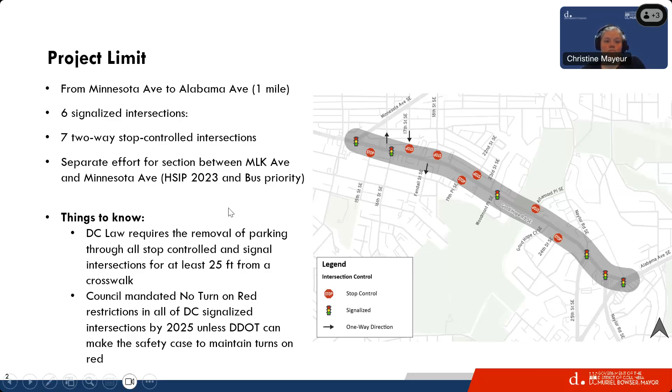We do see a lot of pedestrian crashes as well. That's why you'll see a focus on pedestrian safety and access to different landmarks, libraries, schools, and bus stops as well.

So we've heard from you previously. I went to the February ANC meetings and kicked off this project with everyone, as well as the Fairlawn Civic Association. We had community walks in February: a virtual walk, an in-person walk on a Saturday, an in-person walk Monday morning, and then a virtual walk in the evening.

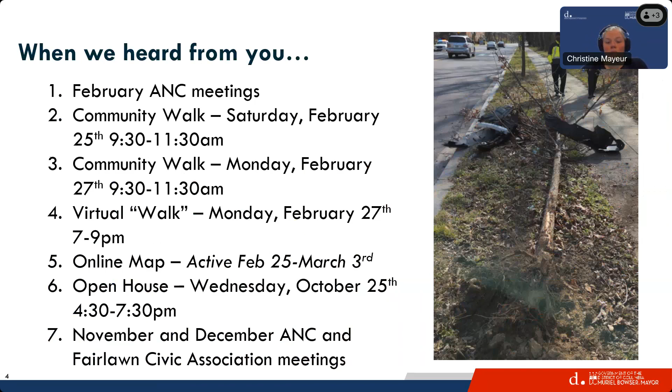We're coming to the November, December ANC meetings, Fairlawn Civic Association, to let you all know about this, and hoping to hear more from you tonight about what you think. Then on Saturday, we'll have an in-person meeting. You can just drop in whenever. We'll be at the Anacostia Library from 11 a.m. to 12:30 in the large meeting room. So if you want to talk more, please do come by.

What we heard from you in all of these meetings - I won't read all of these - but kids don't feel safe crossing the street to get to Ketchum. We have siblings dropping their younger siblings off at Ketchum, going to school at Kramer and Anacostia. It doesn't feel safe to cross the street.

Drivers go too fast on Marion Barry, especially on the hill near Marbury Plaza. The area near Skyland gets really congested. People are blocking lanes trying to get in and out of the CVS. And the sidewalks can often be uneven and may have some tripping hazards as well.

We heard some from the bike community, the folks at Bike in Ward 8 as well, that it doesn't feel safe to bike on Marion Barry Avenue, and the routing into the neighborhood would feel less safe as well.

So the goals of this project and all corridor safety projects are, number one, to reduce speeding. We want to also improve safety for people walking, taking the bus, driving down the street. We want to address safety and crash patterns at any complicated intersections that exist, any of those skews where you can't quite see.

We want to remove or enhance safety and visibility at uncontrolled turns from side streets. We have a lot of sightline issues, especially in the older, more historic Anacostia area of Marion Barry. So it's really important so that people can see when they're making their turns, so they don't get in crashes. Enhancing crosswalk safety so drivers and pedestrians can see one another much better, and improving bus service and access to the bus stops along the corridor.

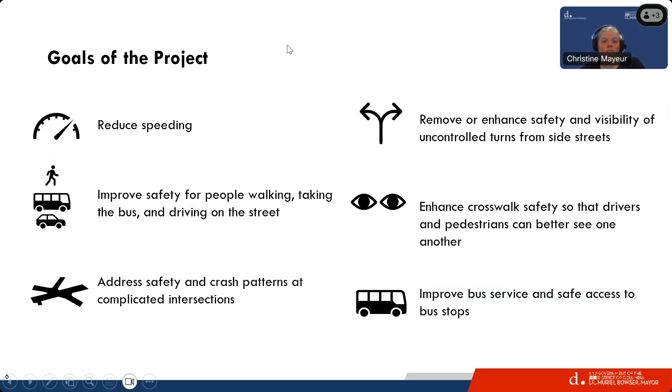So we are hoping that this can be a quicker process, so that you don't have to wait years and years to see safety improvements to the street. We're aimed at finishing up this concept this fall and winter, presenting a revised concept early in the new year. And then from there, starting the construction design plans and getting that built on the street.

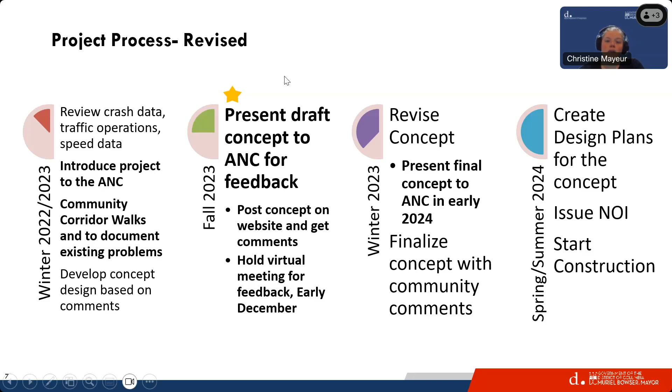We are going to be doing this in a temporary treatment format, so that if there are changes or adjustments we need to make after it's all implemented, we can evaluate that and come back and make those changes. That way we're not having to completely redo a new curb and tear up the street again and again for construction. So these temporary treatments and quick build treatments allow us to test things out before we go into a major capital project, moving curbs and doing concrete and all of that.

So we'll get into the draft concepts. I'll walk through these - please put your questions in the chat as you go, or you can hold them till the end. I want to get through all the slides, and then we can talk about a couple comments and questions as we're able.

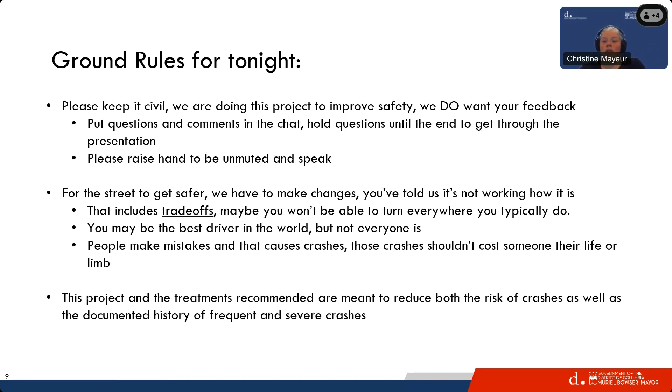Okay, so we'll go ahead and start at Minnesota. This is the beginning of the project area. We'll establish a left turn lane here at Minnesota as you're heading away from MLK.

After you get through the intersection, we know a lot of people park along this, and it can tend to block up the intersection. So we're trying to keep people from parking through there and help traffic move through a little bit safer.

There's an option for turns coming off of Minnesota. This is a right turn only lane as you're coming off of Minnesota Avenue, and you're not allowed to make left turns. So there's an option to either do a curb extension, which is a little bump out you see there in blue, or, as you'll see on the online map, we can do a median island that would really prevent people from holding up traffic making a left turn when they're not supposed to. We ask about that in our feedback form, and I'd love to hear feedback on it. Please let us know what you think.

Most of the corridor you'll see is still a single lane in each direction, just as it functions today. But marking out the parking really helps to visually narrow the street, so people travel slower in general.

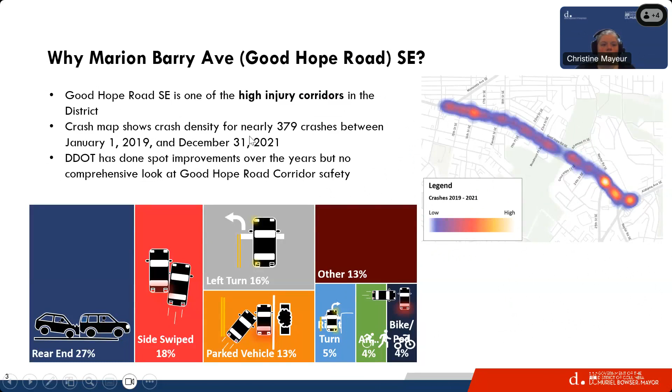Starting at Minnesota, we've got two options for safer operations here. For the right turn coming off of Minnesota, we can either do a curb extension, a little bump out, to shorten the crossing distance, or we can put in a median island to make sure people aren't making left turns illegally from this right-turn-only lane.

For eastbound Marion Barry, establishing a left turn lane so people can wait out of through-moving traffic and have a safer way onto Minnesota. Coming through the intersection, we're blocking off so it's not as easy to park through the intersection and block traffic, instead marking where people can park just past the intersection and prior to it on the other side.

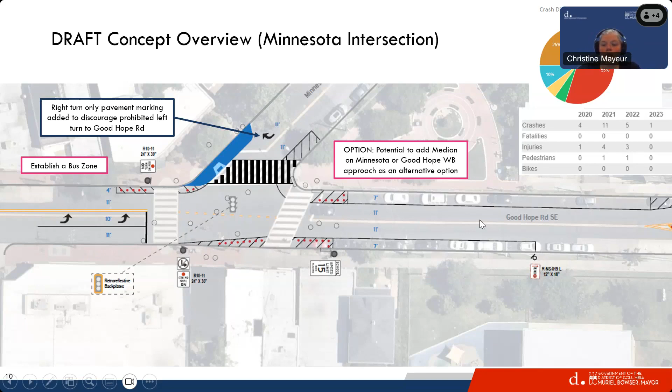At 15th Street, we're looking at a signal and a way to make the crosswalk safer for Ketchum. If the signal study finds the intersection isn't appropriate for a signal, then we look at treatments like a marked curb extension, a little concrete median island, and some enhanced signage for visibility.

For 16th Street, adding a crosswalk just before you get to where the current signal is by the bus stop. That way, for the bus stop on the westbound side of the street, kids getting off the bus who need to get back on to get home have a safer place to cross that's not within the existing bus stop area.

And in the laundromat area that we've heard a lot of concerns about, adding curb extensions or little bump outs. And we can add another signal, a little light, so people know where to cross, and we can stop traffic for people trying to cross in an easier way that simplifies everything.

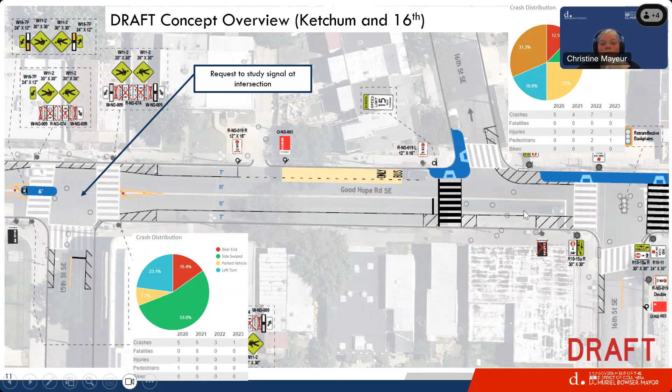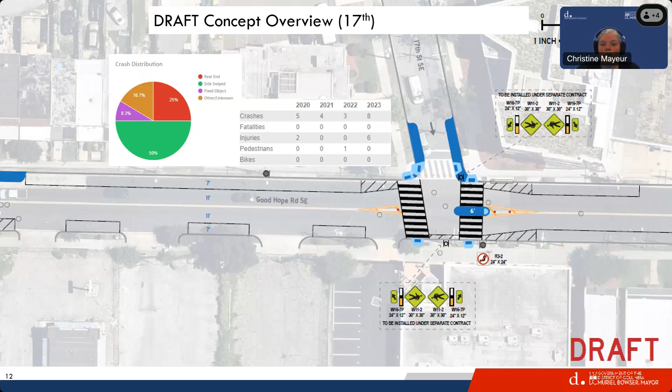Up at 17th Street near Bread for the City, we're looking at adding crosswalks, a median island, and some bump outs. We need to make sure this works with the bus movements coming to 17th Street, but enhancing that crosswalk, especially the one connecting the Bread for the City side with the community center, with a little flashing beacon where you press the button and cross when it's clear, with traffic stopping for you.

Between Fendall and 18th, as you're heading towards the library, not much really changes. We're just marking out where it's legal to park, and where it's not legal, hashing that out and adding some kind of hardened barrier so people aren't illegally parking.

We are looking at a signal for 18th Street to see if we can enhance safety that way. And then at the crosswalk that's existing, adding a median island, a little concrete island, so that people have a safe place to wait in the middle as they're waiting to cross both lanes of traffic.

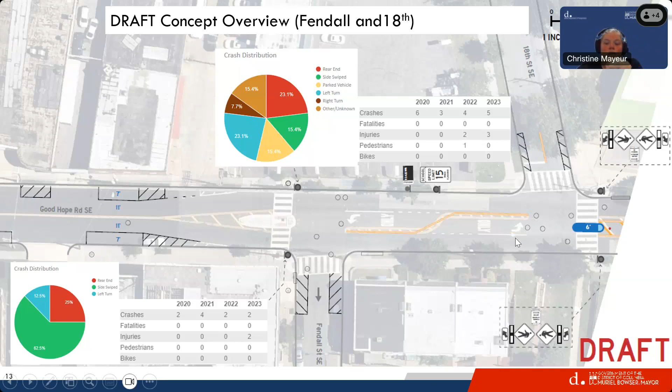Heading up towards Thelma Jones, we're looking at adding a crosswalk here right at the intersection and potentially blocking off the alleyway so that you can only make a right in and a right out. We see a lot of crashes here for the amount of people using it. So one way to reduce crashes is to sort of make that so you can't make the left turns in and out; we tend to see the crashes happen because of those. So with this, adding the crosswalk, adding a median island, and then adding a flashing beacon as well. That'll help people cross.

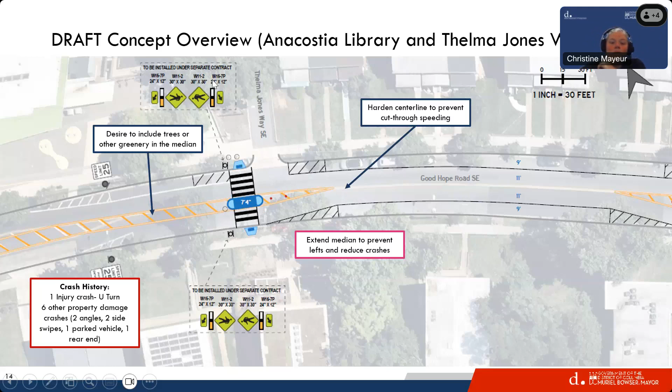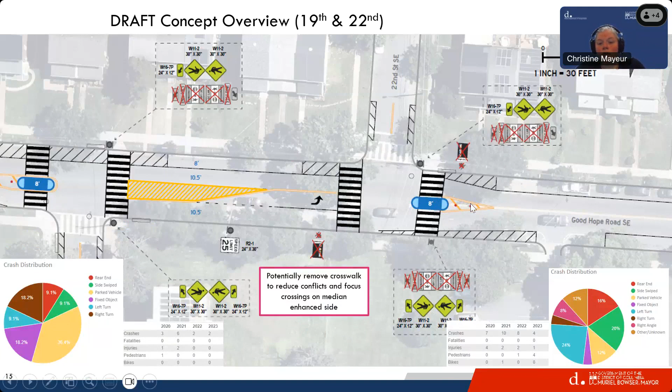Up here between 19th and 22nd, this is where it starts to get more residential as you're heading up towards Marbury Plaza. Adding crosswalks here, marking parking on the north side of the street. Adding a left turn lane for 22nd Street. So there's a little pocket there. You can wait out of the way of moving traffic. We can add concrete median islands to some of these crosswalks as well.

And as you're up here near Marbury Plaza, we've got a marked curb extension here that we're looking at doing in concrete, and that'll shorten the crosswalk for the seniors that live up here. Adding some signage. Generally, what you'll see across the corridor is signage and retro reflective backplates that help people be more aware of the traffic signals that are there, so they're not running the red light just because maybe they can't see it.

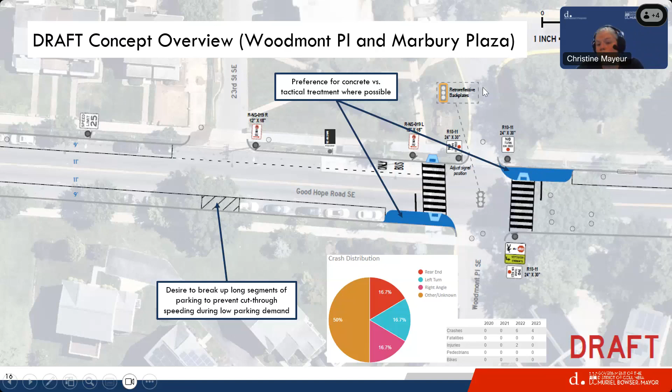As you come up the hill towards the hiker biker trail, this is the crosswalk that currently serves both sides. So adding a concrete island and then adding the beacon, the same kind of pedestrian beacon, making sure that it's clear that it is only one travel lane in each direction, and marking parking, and then a median for that section to hopefully reduce some of the speeding that we see through the area.

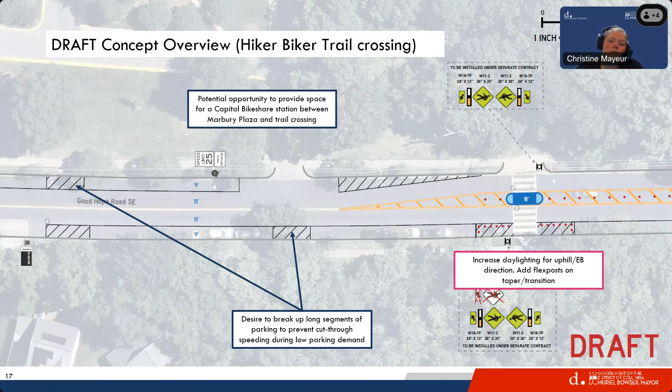In the parking, we're going to break these up. Of course, there's a couple hydrants along the way, but we don't want the parking, if it's not used well, to be used as a passing lane. So we're looking at breaking that up. And there is absolutely the potential to add bike racks or micromobility corrals in these areas as well.

Altamont's another location. We're looking at a signal. We see high rates of crashes in this area because of speeding and some due to turns and hitting poles and things along the street. So looking at a signal, looking at ways to make it a little bit slower through this area, and then establishing a left turn lane for people to go up Altamont.

Altamont could be turned to one way. We have that option. We can do that through this project. But that would be one way heading towards Naylor instead of away. We've heard from a lot of residents on Altamont that there's a lot of speeding issues for people making the right off of Altamont and then coming down the hill very quickly towards Marion Barry. So trying to look at ways to make that safer. So if it doesn't qualify, these are the treatments that it will look like generally. If it does qualify, then you'll see a couple more changes to that intersection.

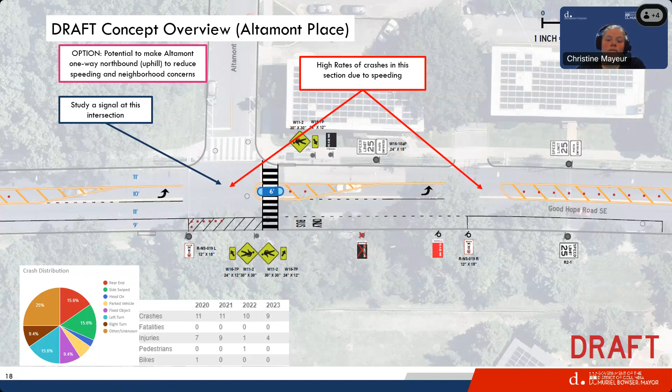Up here by Good Hope Court and 24th, adding crosswalks here and moving the bus stop just past the crosswalk. That way, when people are getting off the bus, they're not trying to walk in front of the bus. We see some pedestrian crashes happen from those kind of conditions. So if we move the bus past the crosswalk, people can get off the bus and head towards the back. That way they're not at risk of being hit if they're in a crosswalk.

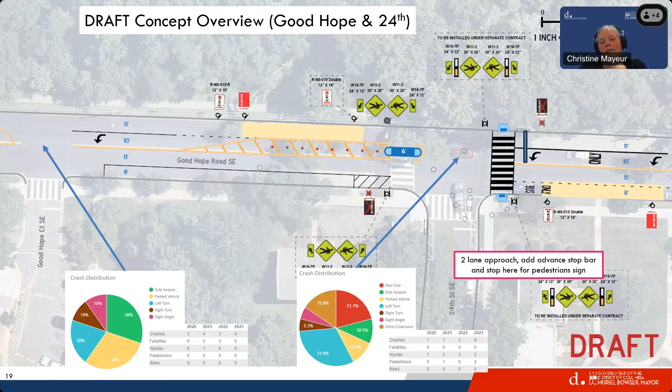So adding the median island, concrete island there as well to help with that crossing, and then marking the crosswalk on the other side as well. Adding the flashing beacons across the corridor, you'll see the flashing beacons where we have bus stops primarily, because we know that more people are trying to access the bus than sort of a typical crosswalk.

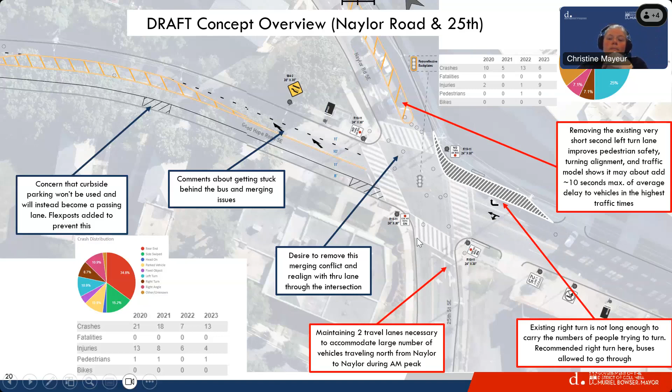Here at Naylor, looking at the turns and the movements that we see, we're adding a dedicated right turn here. As you approach Alabama, you can make the right in your own lane to Naylor here, and then head south to Alabama if you'd like, or continue on. And then a single through lane as well.

To help serve the number of people making the left turn, we're looking at adding a dedicated left turn here, as well as using the existing, I think it's an all movement lane. You can go through, you can make a right turn or a left turn. So making that so that you can make a left turn from either lane as well, since we've got so many people making that turn at all hours of the day.

One key thing that we do want people's feedback on is we see a lot of desire to park curbside to go right into the CVS and the bank. So we want to make sure that there's an option for how to deal with that. So we can take the curbside lane on the north side and make that parking so people can more easily access the CVS from the curbside, while also working with the developer who built Skyland to enhance their signage and make sure people know that they can park for 2 hours for free in the parking lot.

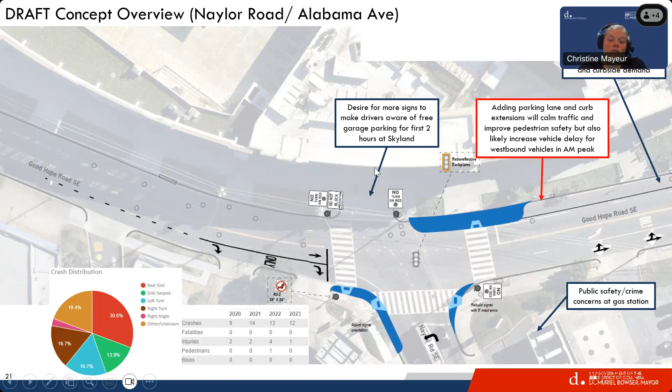And then up here at Alabama, there's a lot of traffic conditions. Again, people parking on the curbside at CVS tends to block the right lane. If you're coming down Alabama, heading through to Marion Barry, the rightmost lane gets blocked because, again, people are going to the CVS and bank. So if we do make that parking, and we can try this even in the short term, putting in a curb extension and then blocking off the rightmost turn lane, so that there's a single lane and you can make your turn to Town Center Drive, or you can make the right to Marion Barry Ave from the same lane. And then hopefully that helps with the confusion and the traffic congestion in the area as well.

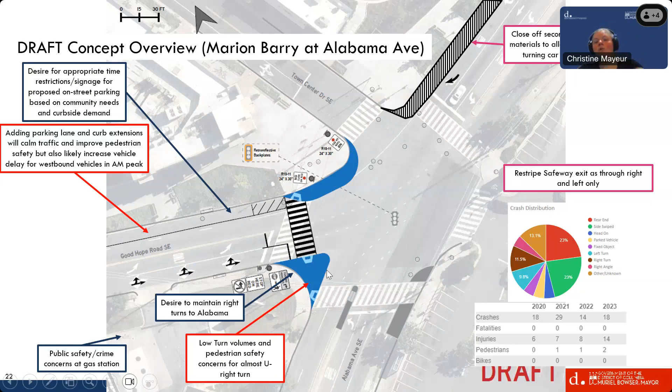Because we didn't see a whole lot of people making the right turn from Marion Barry, that's almost kind of a U-turn onto Alabama Avenue. Just removing that anyway to make it a little bit safer for pedestrians as they're crossing, so they don't have to deal with so many turn conflicts as they're crossing the street here.

And Christine, timeline-wise, I believe we're targeting this for implementation by the end of next year. Correct me if I'm wrong. Yes. We want to start construction hopefully in the summer of next year at the latest. And then it should only take a couple months to build. So we should be able to finish sometime later next year. But if we experience a really tough winter, or, you know, who knows, it may go into 2025.

Okay, I'm seeing your comments in the chat. We're noting those. Bollards installed in the no parking zone on Good Hope in front of Kitchen Savages. Okay, take a look at that location. That may be just past our study area, but I can pass that along. If it's not our project, it's someone else's, and we can pass that along.

Blocks the buses. Oh, yeah. Okay. That one's a little bit past us as well, but I'll pass that along to the project manager. Yep. Thank you for coming. We'll try and get this in as soon as we can. We just need to make sure that we get as much feedback and we hear from everybody as much as we can.